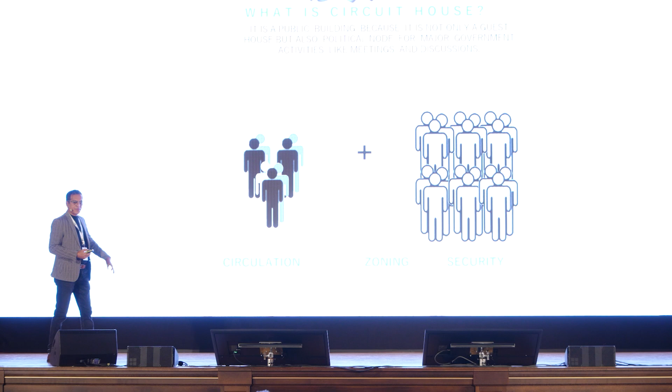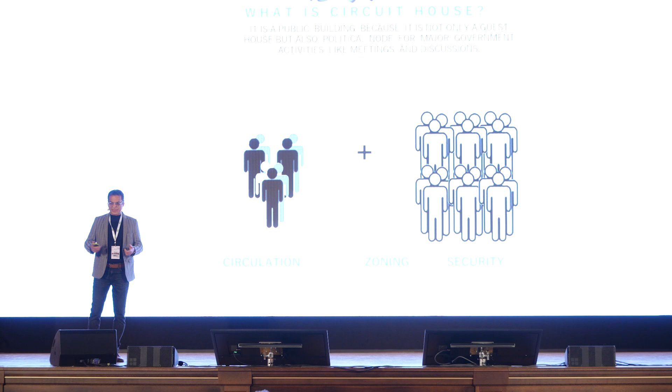The main thing is that we have to look at circulation, zoning, and security. Security is the most important thing, and the circulation has to be segregated most of the time, because these government officials don't want to meet common people at every crossing. So that was a real challenge. This is in the city of Pune in Maharashtra, designed for the government of Maharashtra, with PWD as the execution authority, and the user department is always the collector.

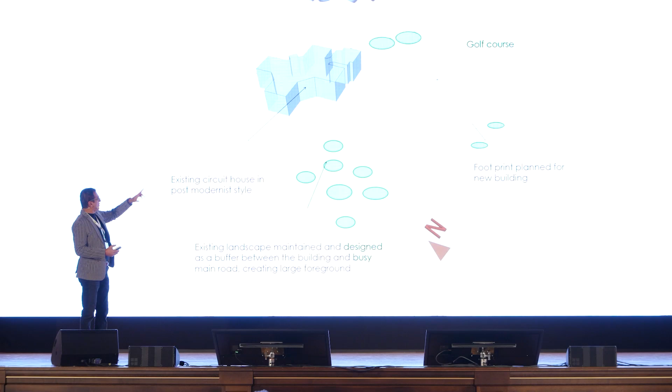So this was the site. One side is a golf course. Then we have one existing circuit house there, and there were some existing trees. After leaving that mandatory space required for the fire engine, because these days in India a lot of fire laws are made because of some incidents, we take it very seriously. So after leaving all that, the footprint that you get is what you see there. And then we start developing the form.

Our general theory is that we don't allow the floor plate to be more than 7 meters from the edge of the building, because light travels comfortably till there, so beyond that there's a dark zone. So obviously, we always create a courtyard. That courtyard is not something new, it has been used in our traditional architecture as well, because it goes very well with our tropical climate. So this is how we did it.

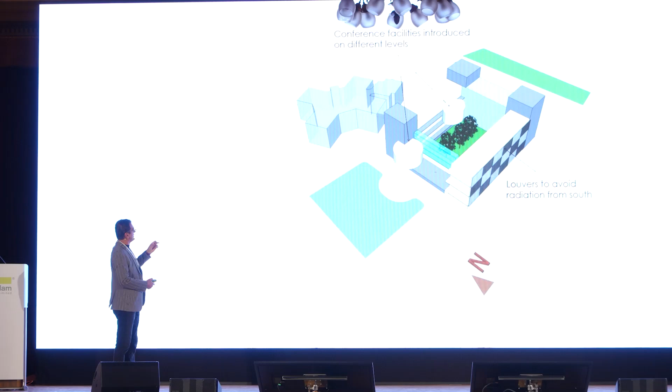Then what we thought of was cutting off the west side, because there is a north, east, west, and south, and west is normally very harsh. So we thought of not having many activities there, and finally just provided two conference facilities, since this also acts as a nodal activity center for the government.

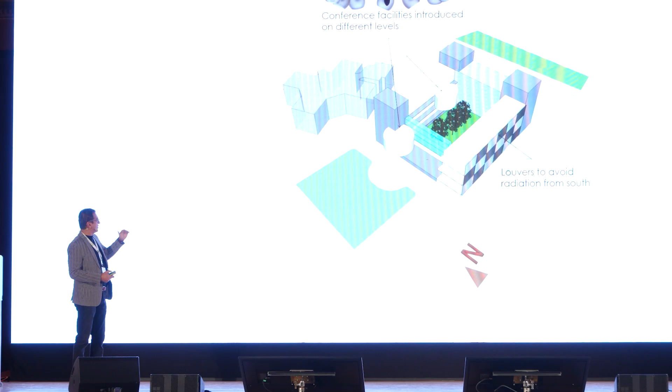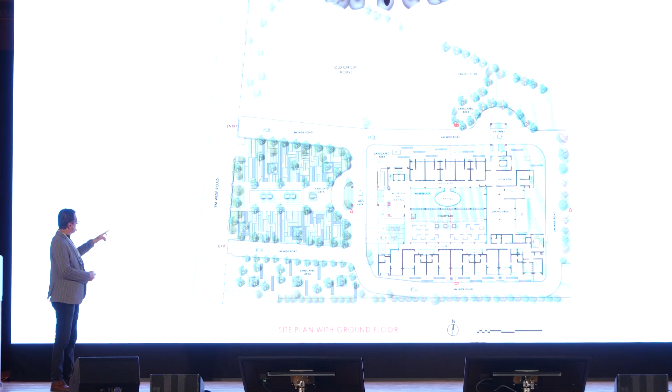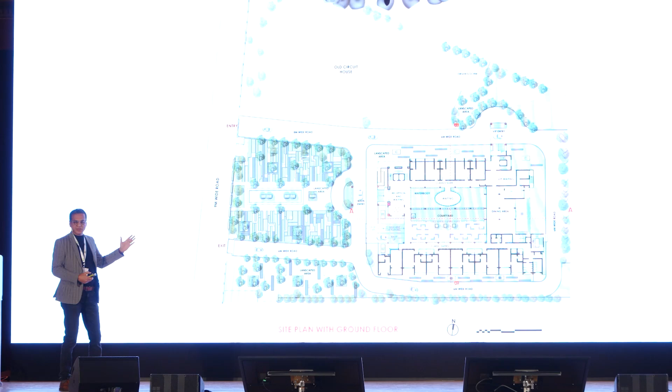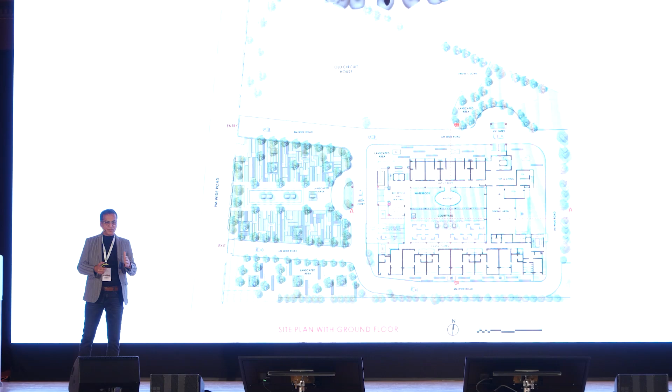We'll just go quickly through the plan. What you see in front is a landscape area, which we wanted to retain with those trees, so we just kept the setback, as I told you in the first slide. The landscape is designed so that it flows as if into the space, because we believe there's a very thin line between exterior and interior. So the same kind of landscape is there in the courtyard as well.

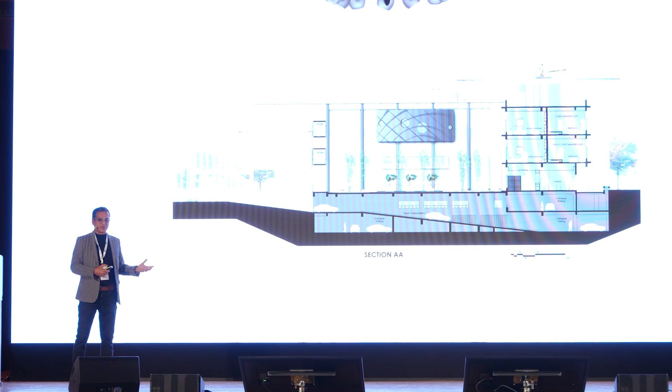It has a helipad and a separate access for the ministers to come for whatever business they have to interact with. The idea was that it's green to get them by helicopter - otherwise they come with a huge convoy in the city, there's a lot of wastage of fuel and a lot of officers on duty. So we thought this was a good idea, and the government was convinced and allowed us to do that. Now they're following it up in the new circuit houses that are happening now.

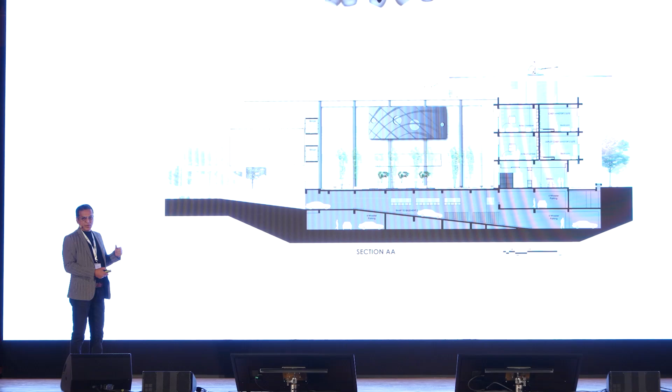So this is the front facade, with that exposed concrete wall and these louvers, vertical fins, because it faces the west. This is the courtyard - in government projects, you have to really work on a minimum built-up area, so we cannot provide a lot of open spaces, though the occupancy is variable. So this kind of courtyard helps accommodate that extra waiting space, and there's also a water body there.

What you see there is a conference. We worked a lot on this courtyard to decide the width to height ratio because we wanted that courtyard to remain shaded most of the time, because India being a tropical country, it's very difficult to use exterior spaces at peak time. So we worked on the width to height. The courtyard has a water body that acts as a microclimate modifier - we normally have these kinds of things. Then there are two sleek bridges which connect the two wings. Again, here's one more view of the courtyard.

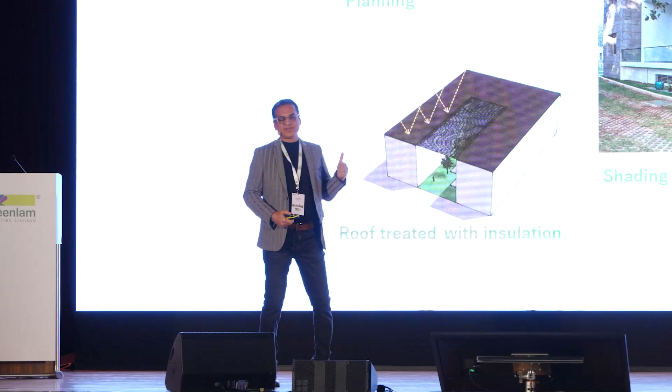We use all passive strategies. This is a green building rated 5-star by Griha. All interior forms were inspired by nature - we used those motifs here, and the entire furniture was done in that style. Of course, we used sustainable materials like new mica from Greenlam, but yeah, that is mandatory.

In this building, we did some 230 artworks done by about 30 artists. They were given the same theme: go green, or you cannot survive without flora, fauna, or sustainability. This was all done to educate people through artwork. This is how the cafeteria looks, with those chairs shaped like leaves, and this is the landscape as a public plaza, where again you can accommodate some seating, as I said, looking like it's extended from the courtyard.

This is the final side of that. This is how it looks.

The second project that I'm going to show you - can I use water? - is a collector office, the collectorate in Pune, again for the government of Maharashtra. The collector office is normally a powerhouse where the collector of the district sits and governs the district - that's the system there. And the building has to show that power. So, thank you.

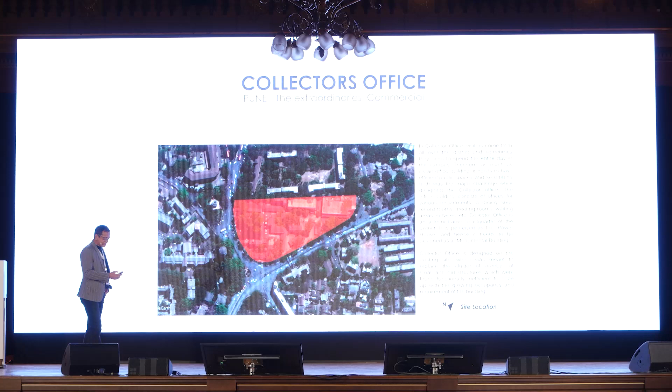So this is the plot. Well, it wasn't actually a plot—there were small structures before on the same existing site where the collectorate was already located. But they were functioning in small structures because they kept extending as per need, and it was becoming quite inconvenient since various departments were segregated, so they wanted to demolish this and build one big structure to accommodate all departments.

So this was the scenario before we came into the picture. This was already done when they invited us to design this building—they had demolished all the buildings, and these were the trees there. There were 197 trees on the campus.

In the city of Pune, just cutting any tree is impossible because there is a lot of public awareness. If you have to cut more than 5 trees, the matter goes to court. That's a good thing because people are really conscious about landscape and environment, but this was the real challenge—how to save those trees. In India, we all go for morning walks in public campuses because we don't have enough public spaces, so many people keep watch on whether trees are cut or not.

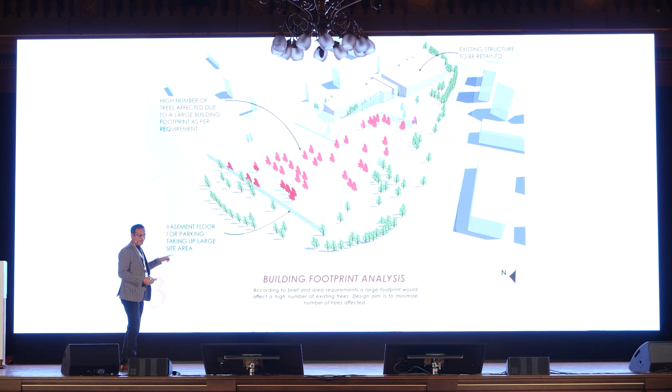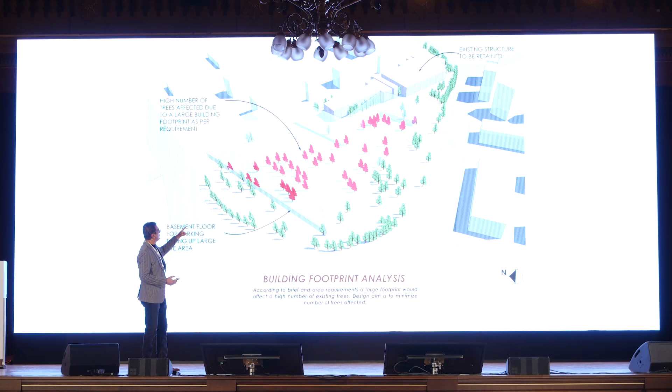If we had gone conventionally with the design—this is about 200,000 square feet project—we needed more than 250 car parks. If we had gone conventionally with a basement, it would have forced us to cut a lot of trees. There was a previous proposal where somebody recommended cutting 120 trees, but that was a menace because most of these trees are more than 50 years old.

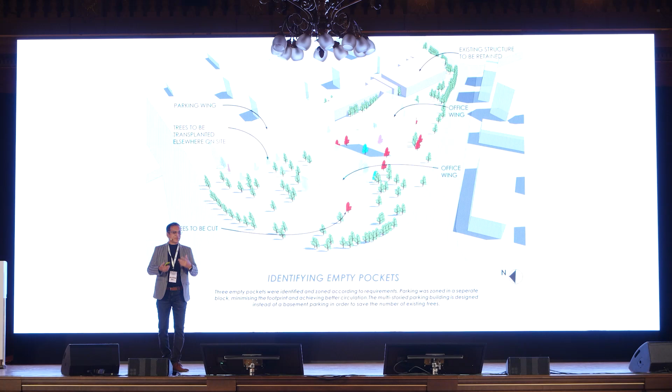So that was not possible, and we took a different approach. We found a few patches where there were fewer trees and located our office wings there. Rather than going for a basement, we decided to have a multi-story parking building connected to these wings. It was a sustainable feature because the officer can simply drive to his floor and just walk, without using elevators or mechanical energy. That was the idea.

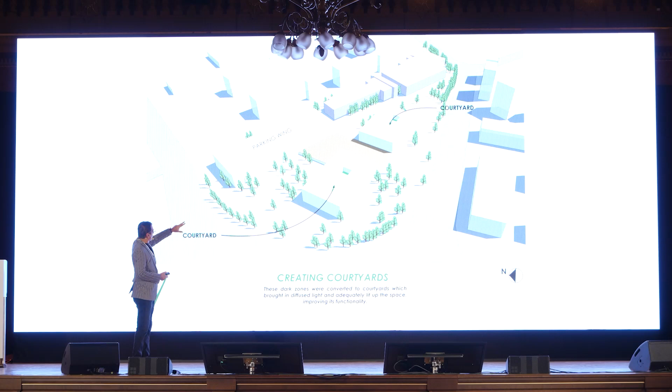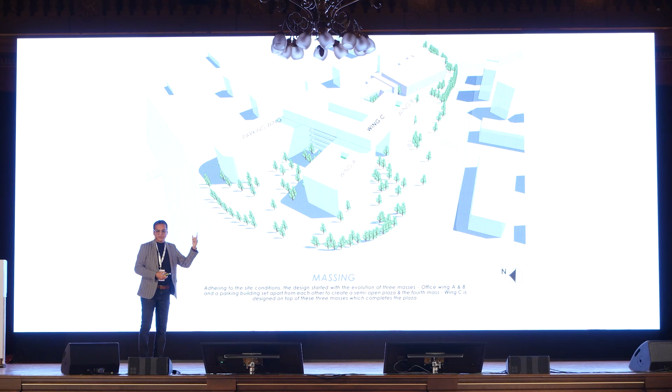So we started designing again with our philosophy that we don't allow more than a 75 meter floor plate. Then courtyards were created, and the parking building behind was connected by bridges. On top of that there is wing C, the third wing, where the collectorate and main deputy collectors and officials sit. By doing this, we saved almost 112 trees—only 8 trees needed to be shifted or cut. That was the biggest achievement, and on this basis we got this project through competition.

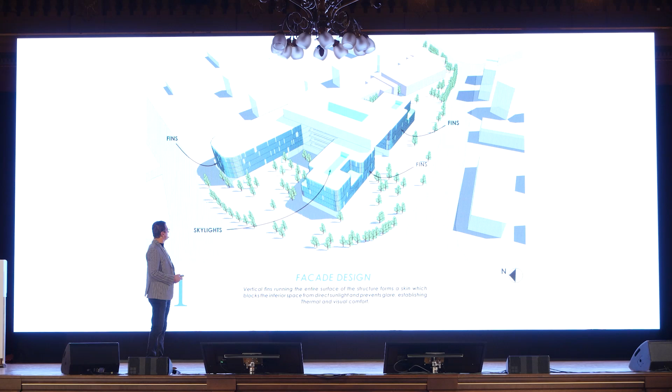This is again a 5-star rated green building by GRIHA. We used fins to cut the radiation—the biggest challenge in Indian climate is that the sun and the breeze come from the same direction, so how you cut the radiation while still allowing the breeze is important. In most government buildings, and in this building particularly, out of 200,000 square feet, only 10,000 square feet is mechanically air conditioned; the rest is naturally ventilated. That was a big challenge.

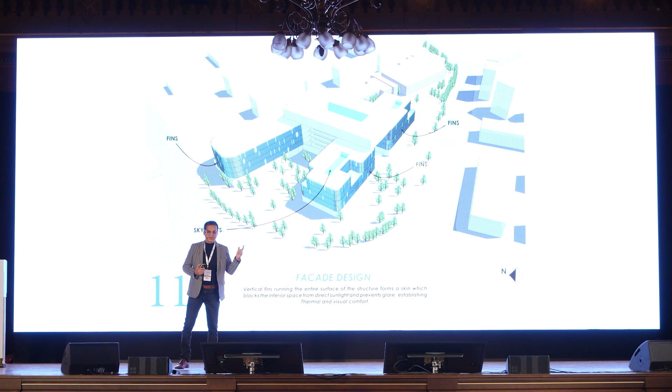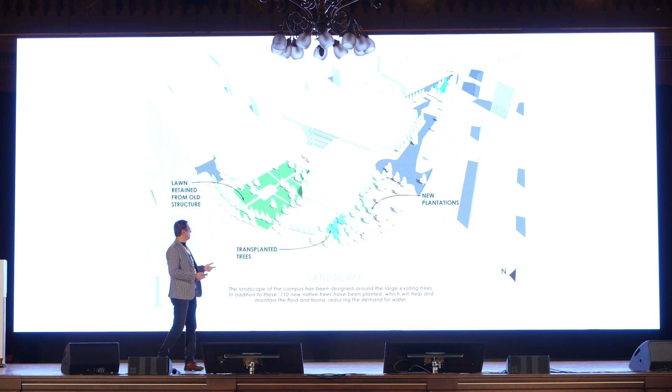There's one more thing—there was one heritage building on the campus, and the heritage department made it mandatory to use its porch. That building was small, and they put a condition that the same porch should be used for the new building, which was funny because the new building was supposed to be 200,000 square feet, while the existing porch was only 6,000 square feet. Just imagine such a small porch.

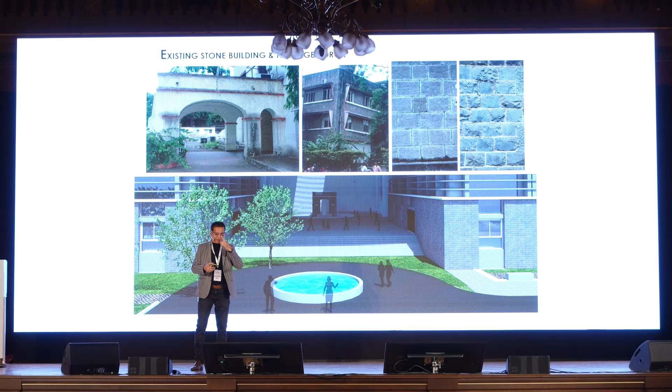We talked to them and gave them the idea that rather than making this an entrance porch, we could make it a monument. So we used the same porch, rebuilt it in the central plaza. The previous buildings were of stone masonry, so whatever stone was demolished, we used it for the ground floor of the building you can see here.

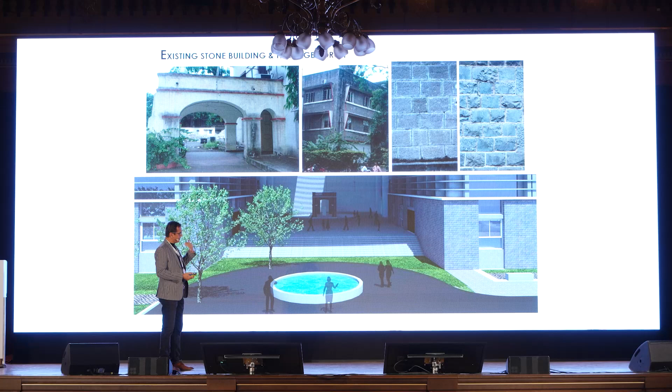Of course, that was not enough, so I had to bring in some more stone. So this is the central plaza of the building, where there's a nice mural.

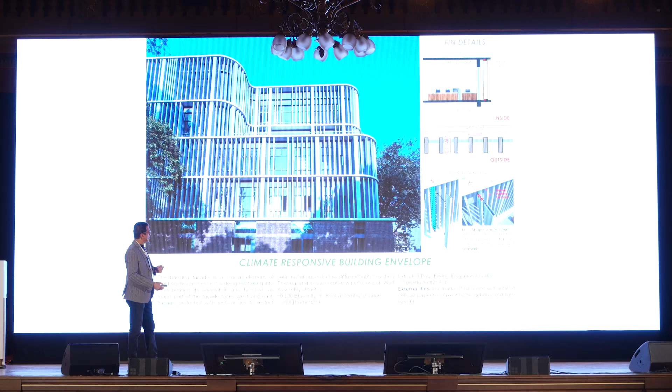So this is the facade, as I said, that climate responsive building envelope. I have to rush because I have 2 more projects. This is the front side of the building. The distance between these 2 wings is about 22 meters.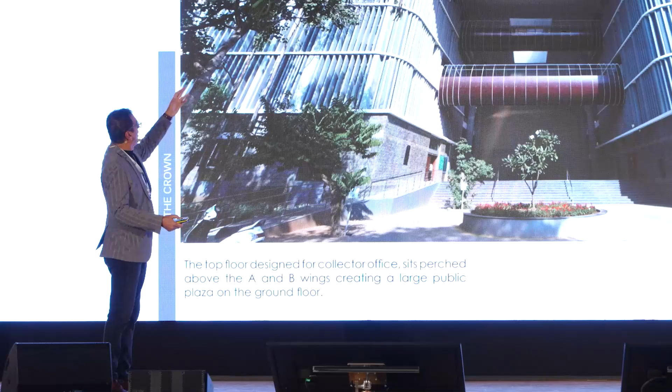You don't see it here, but the upper mass is projecting out by about 8 meters. This is another view, I talked about this central courtyard. We have this natural ventilation system, it extracts the winds from it, creating a stack effect. This is how these are naturally ventilated.

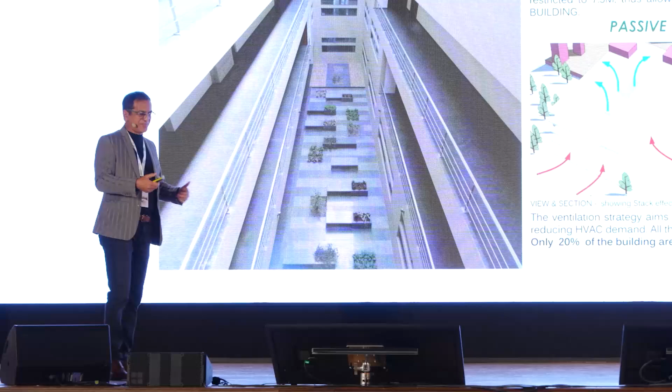So this is the bridge that I was talking about. This is one more view. Some more views of the same plaza. The structure you see here is the old structure which has been rebuilt here.

So the third project I'm going to show you is a winery, Fratelli Wines, which you must be knowing. Fratelli is an Italian brand. They wanted to have a huge winery in India, and they chose a place called Akluj, in the district of Solapur, about 150 kilometers from Pune. It was done on about 300 acres of vineyards, but the actual area given to the plant was around 32 acres, and this is what we designed there.

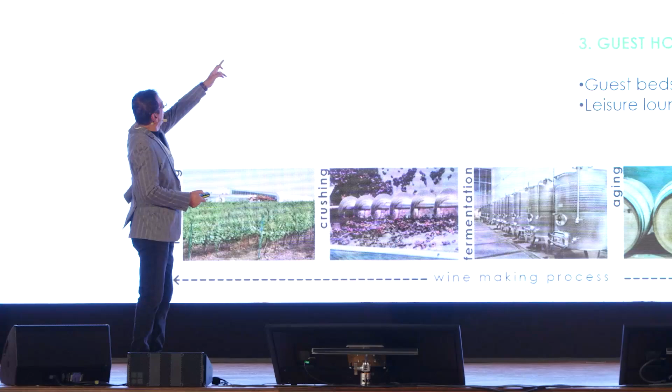Now I don't have to explain the process of wine making, but it was a good study for us. Mainly, I'll just repeat: there's a manufacturing unit of about 9 lakh liters. It's a huge winery considering Indian standards, 9 lakh liters per year.

And then there's the administration block and guest house, because this site is 50 kilometers away from all the major commercial areas, so you don't get anything there. We had to have our own accommodation and other facilities.

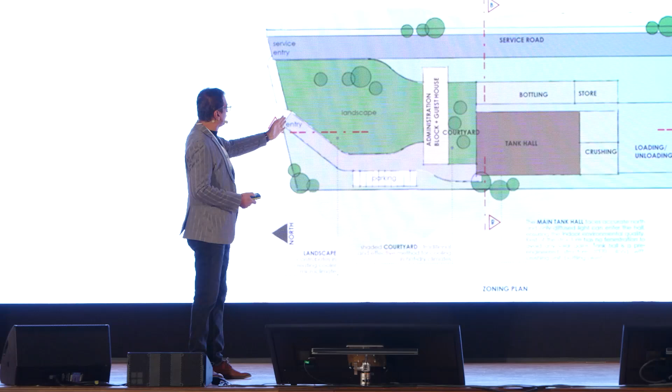This is the front main facade of the building, some pictures. The best part of this was that they had already planted the grape plants -- they are plants, not creepers -- and the crop was getting ready within 5 to 6 months, and they did not want to waste the crop. So this entire building was done in just 5.5 months, right from the designing.

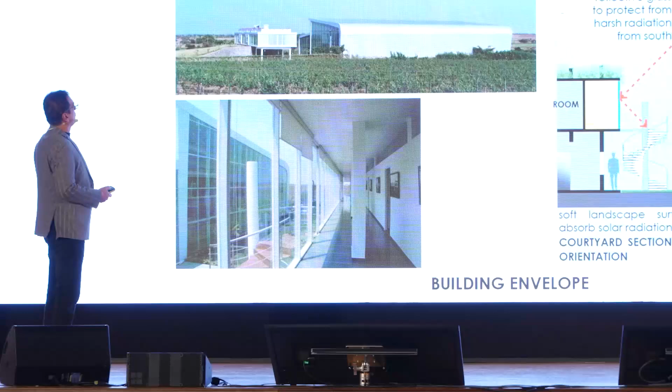We used PEB structures, pre-engineered structures. These are some more details of the roof, how we used that layer, because the tank hall is not air conditioned, but the tanks are jacketed, and we need to preserve that temperature there. We cannot allow the loss of temperature, so we had to work on that.

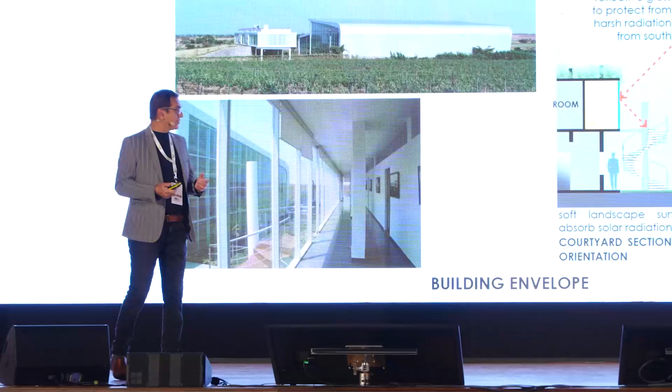We only kept the north side open with glass. There's some more photographs. This is again a very slick structural member supporting the span, here again about 22 meters.

We had introduced a system -- Fratelli had introduced a system of keeping the cask there, but it was not getting a good response, so we finally used it for their own store.

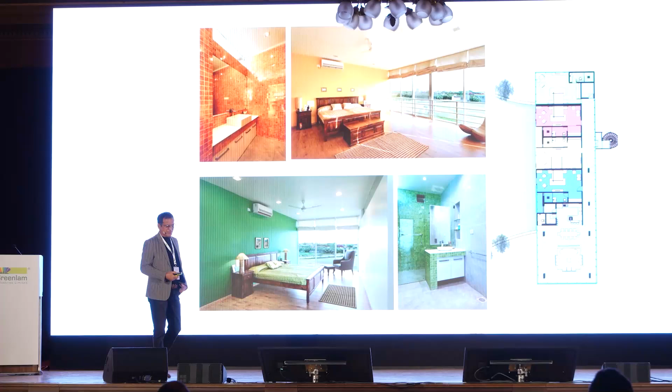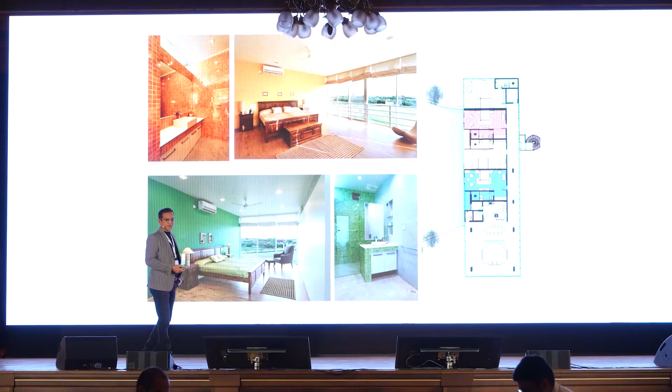Interior was minimalistic. They had brought in some ready-made furniture, and we had to just play with the colors. There were only 4 rooms, so we played with different colors -- it was a very cost-effective project. We just used one color for one room, and that's it.

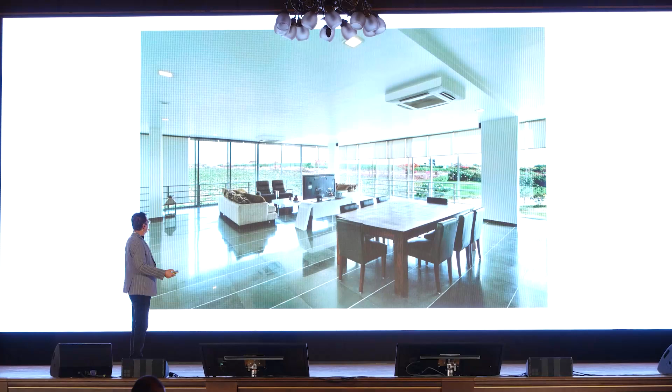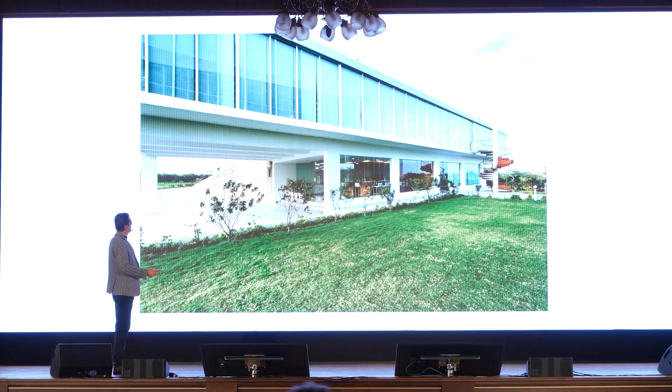This is the wine tasting lounge, again on the first floor. Very simple specifications -- we have used Kota stone flooring and just plastered walls. This is another view of that. One more view.

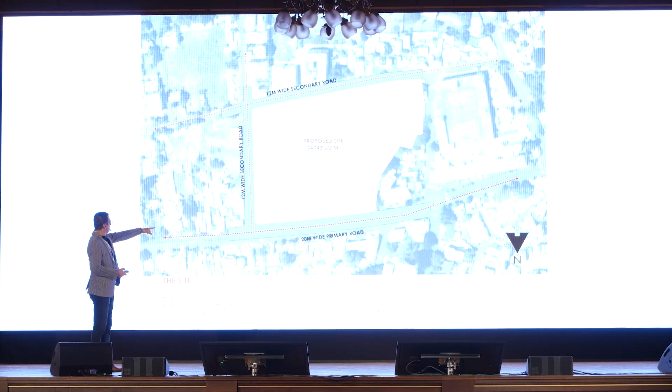This was a very good project where there was an existing bus station, but they wanted to redo it and demolish it. We have 3 roads on all sides. This is the major road, which is 20 meters. So this was the main road, and 2 more roads, but the back road is at a different level, so we could not use it.

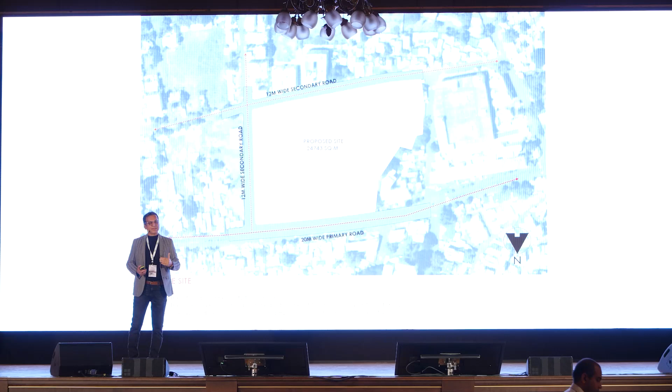The main thing was that they wanted to develop a different model which is commercially viable, which will help sustain this project commercially. So they wanted some commercial area which can be let out, rented out, and they can get some revenue. It was a revenue generating model.

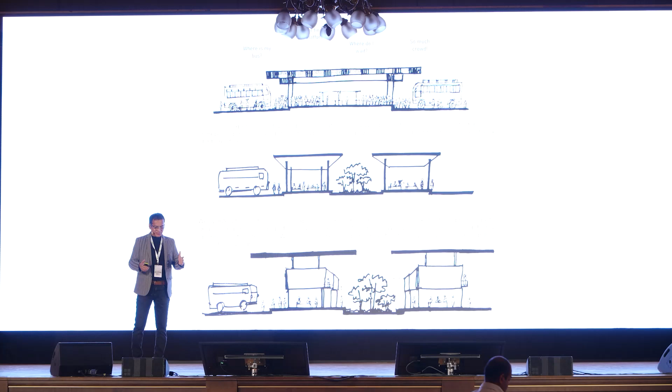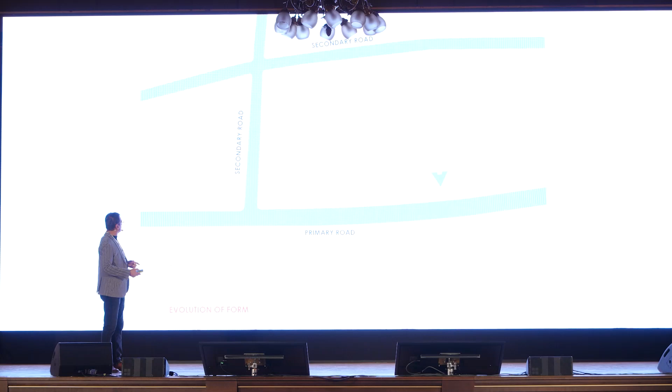So we thought that when there is commercial activity along with the bus station, our previous experience with such buildings is that it becomes very chaotic. So we decided we should have some green space between the commercial area and the bus station. Rather than a typical bus station, we can have a high roof and give more space visually. The idea was to have a bus station plus commercial complex, bus parking, and workshop there.

Then we thought if we did that, there would again be a lot of chaos between the commercial activity and the bus people. So we decided to create a buffer in the form of a central plaza, which can be a garden or well-designed landscape, also used for people to wait or relax, and some common facilities like a cafeteria or canteen can be put there.

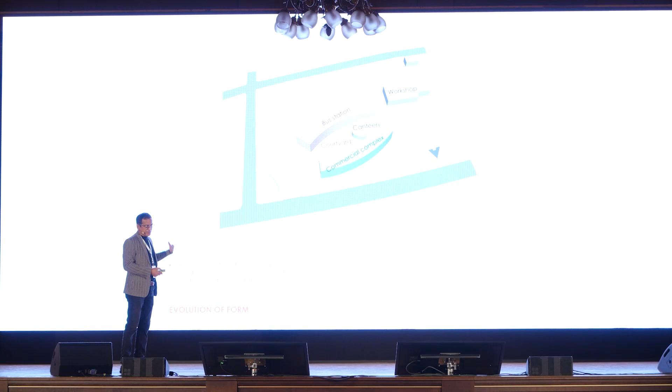Then we designed workshops there, because this road was used for circulation of buses, and the main road was for commercial people. We took the entrance from the side road. So this is how the plan is.

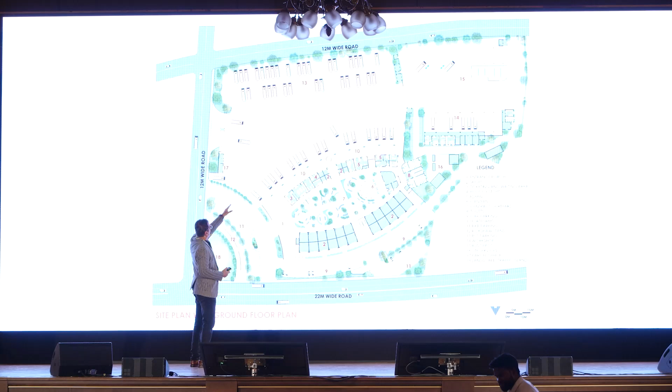You enter from here. What we see here is the entrance plaza. Then this entire thing is commercial - there are shops, showrooms, and offices on the first floor. On the other side is the bus station with bus parking and additional bus parking. And this is the main entrance.

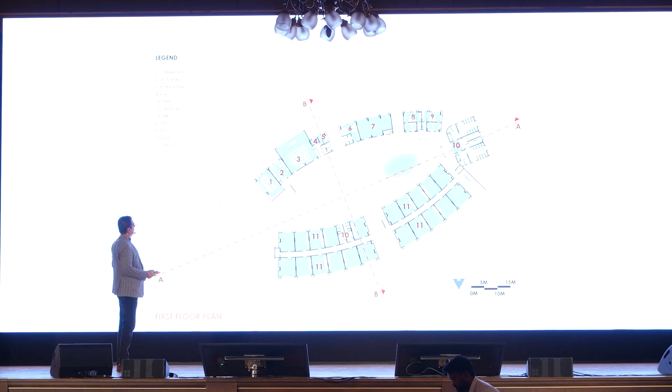There's parking for commercial use and parking for people coming to the bus station. Then this is the first floor, upper level, where the offices continue. The back side has all the requirements - again, this is for the government of Maharashtra. MSRTC had some requirements, so we accommodated that there.

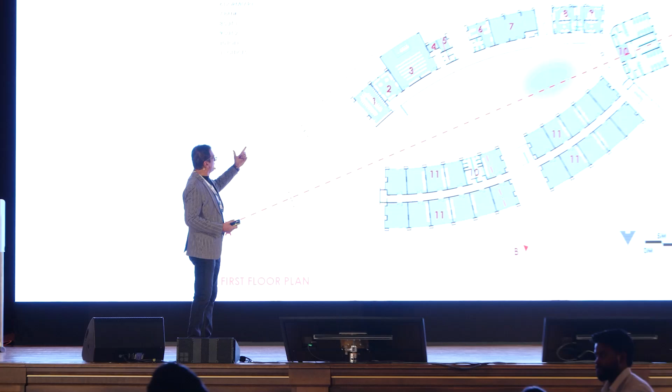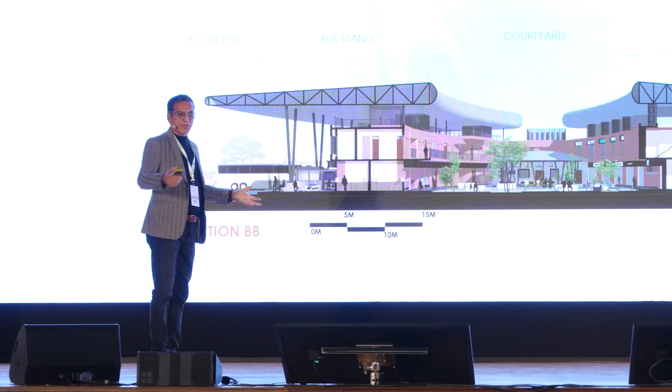So this is the section. You see, this is the bus station, there's a commercial zone, and in between what we've done is a central plaza with landscape. We used only two materials: zinc roof, and below that is masonry with brick cladding.

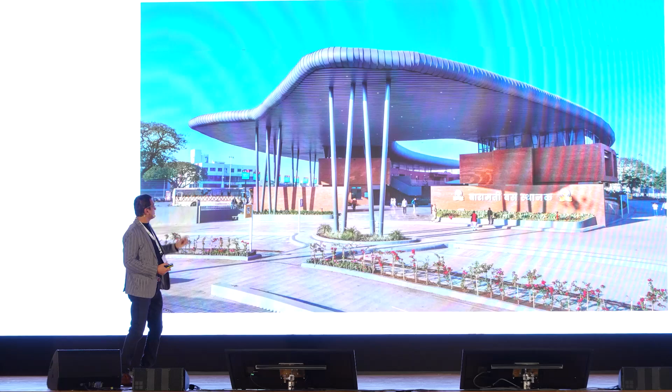This is the construction stage. It was very interesting - we were spanning about 32 meters between two supports. What you see is a huge entrance porch with the entrance lobby. This height is about 8 meters with the zinc roof projecting out, and those are the brick masses.

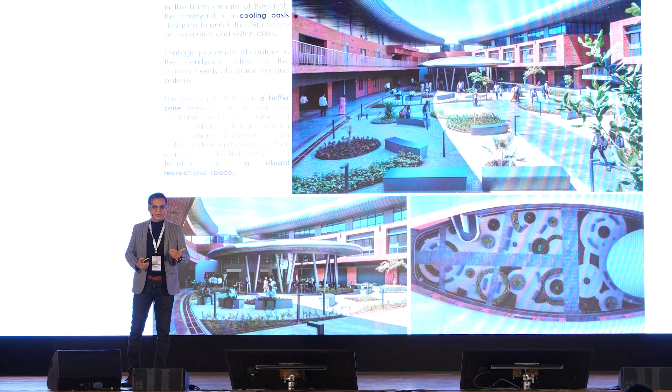This is the courtyard I was talking about. This photography was done just the day after the bus station was inaugurated, but now it is quite crowded there.

As I said, since it's a government project, we wanted a material which is long-lasting and weatherproof. So we chose zinc for that and used VM zinc. What you see there are the brick masses in the lower portions, with brick cladding again. There's another view of that at night.

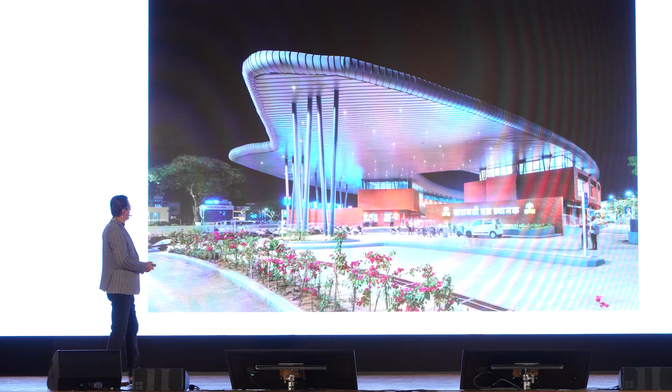This is a view from the bus station side, with huge cantilevers of about 32 meters.

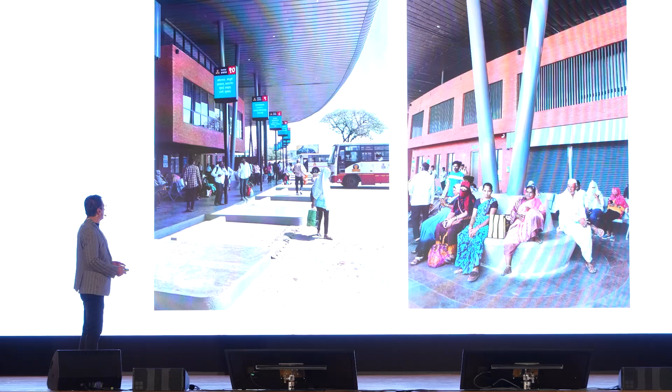Just one more view of how it is being utilized right now. Most of the furniture was built in with concrete to make it long-lasting and sustainable. Here are some views of the courtyard and the seating in the courtyard.

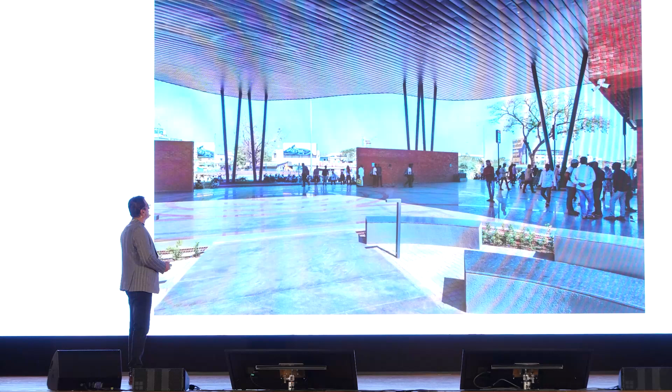This is the view from inside to outside. We used good lighting here - they allowed us to use brands like Endo, though we had to convince the government. Now government buildings in India are improving; even councillors and government officials have a really good vision now for buildings.